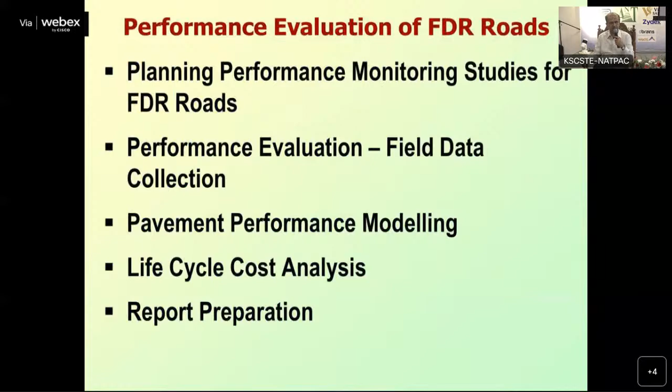Starting, how do we go ahead and plan our performance monitoring? Of course, you all know what is distress in the pavement layer. Changes in the pavement layer materials manifest as distress, and distress affects serviceability. This is a fundamental thing you all know. Performance monitoring is basically determining the serviceability levels, which we define in terms of comfort for driving, comfort for riding, economy, fuel savings, and also safety.

Safety aspect I will not be touching here, because whatever the type of pavement, whether FDR or any new material or conventional material, it mainly depends, to an extent, on the material, but to a large extent it depends on the geometrics of the particular road. So that's why I will be confining to the other aspects.

Comparing performance of road sections having FDR technology with conventional road sections is what we should do. A new technology should be technically viable and economically feasible. It can alter structural or functional performance. Performance is of two types, structural and functional, as you all know. So whatever new technology we are adopting, it should be technically viable.

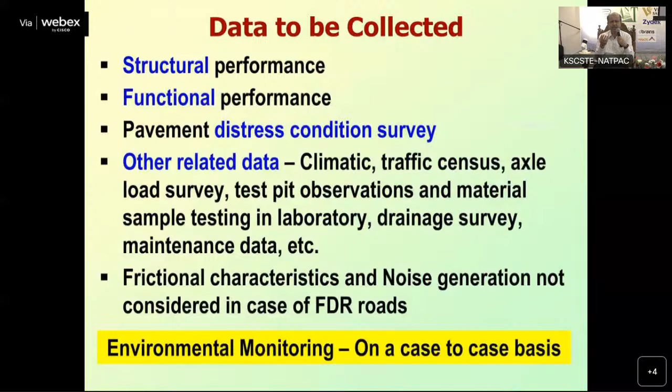Selecting the test sections. There are two aspects: one is a test section, another is a control section. Control section is a conventional road section selected for comparing the pavement performance.

Test section relates to FDR road, restricting the number of variables in the test section. That means in a test section, we can vary the percentage of additive, we can vary the thickness of that layer. So the number of variables can be there. But to get accurate and reliable data, we must restrict the number of variables in a particular test section.

That's the idea. Identification using GPS and chainage. What should be the length of the test section and control section? Minimum should be 250 meters and above. If it is between 500 to 2 kilometers, that would be the best.

Factors to be considered while selecting such test and control sections: Geometrics - for example, roads which have been inherited since the inception of when this city or town was getting formed. You might have seen that whatever the gradients are there in many of the roads, it's almost 6%, 7%. I have not measured, but very high gradients are there.

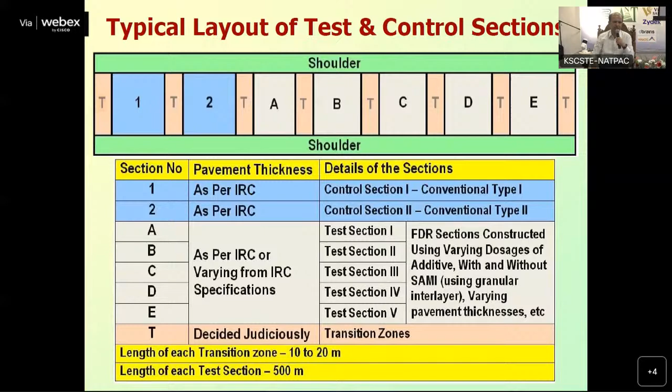If we vary and take different test sections, we would have very valuable performance data. That's important for the PIUs, the implementing agencies, to think and act on. Then, of course, for the transition zone in between, we can decide on the pavement section judiciously. I have given the lengths there.

Next, duration and periodicity of monitoring. The distress is caused by traffic loading and environment. Long-term monitoring, as I told you, is costly and delays drawing conclusions about the efficacy of the new technology. That's why 10 to 15 years of monitoring is ruled out, at least for these PMGSY roads. We can go for 3 to 5 years.

Optimal duration, I have written 5 years, but now even less than 5 years is considered, because previously we used to have this kind of 5-year plan project, but now we think 5 years is too long a period. So 3 to 5 years, maybe I would say.

Alternate way: monitoring sections of varying periods of service life is not possible for FDR. So an alternative to 3 or 5 years can be just 1 year, but in that case we would judiciously select different sections which have completed varying service life. Let's say we have one test section that has completed 3 years, another 5 years, 7 years, 9 years, and we monitor them all for 1 year. We would then have the data.

But of course, the key is that the soil conditions should be similar, weather conditions should be similar, traffic should be similar. But something we get in life, something we have to compromise. So judiciously selecting different sections which have completed varying periods of service life can also help. But I have put that here in gray color, because in FDR we don't have that facility—it's all new roads only. So we have to go with at least 3 to 5 years of monitoring.

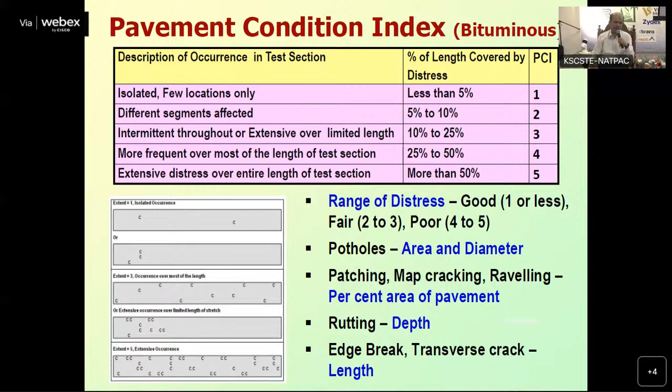Potholes, patching, ravelling, etc. Next, this is the suggested rating chart for the flexible FDR pavement. This, of course, refers to the IRC code as well as international literature. This has been suggested, taken from the draft given to NRIDA, and definitely it can be—it's only a suggestion in the draft. A little bit of changes can be made.

The recording format for this bitumen pavement distress.

Pavement condition index is a simple, convenient and subjective way of rating pavement serviceability on a scale of 1 to 5, based on the overall degree of failure assessed from a visual condition survey.

PCI can be decided using the operations manual of PMGSY, which gives two more methodologies for rating the pavement. One is based on what speed the vehicle can be driven on that road, and how comfortable we feel driving at different speeds. If we cannot drive more than 10 km/h, it is very poor; if we can drive over 40 km/h, the normal design speed, it is good to very good.

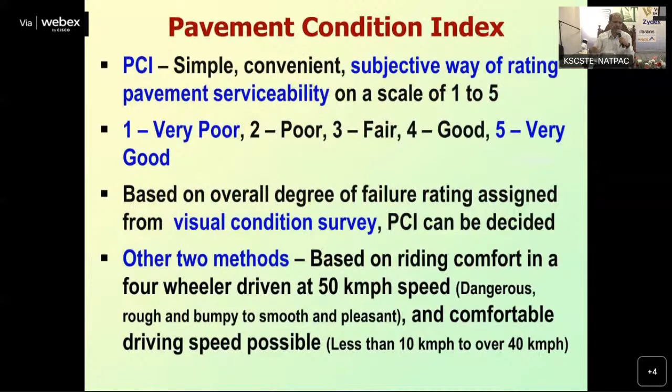Structural strength evaluation involves applying a standard load to the pavement and measuring its response in terms of deflection, stress, or strain. For FDR roads we must use the falling weight deflectometer, as Dr. Vishnu mentioned yesterday. It is the best equipment. Equipments like Benkelman beam and LWD also exist, but the Benkelman beam represents static loading, whereas loads on a road pavement are dynamic. Only the FWD, an impulse loading equipment, correctly represents that loading pattern.

Deflection measurement is the easiest. Stress or strain measurement is very tough, at least for highway engineers. Structural engineers are lucky; they can measure strain easily. But for us it is difficult, so we go ahead with deflection. Strain measurement is easier in structures rather than road pavements.

The deflection test is done in the wheel paths of the bituminous pavement, and the spacing depends on IRC code 115. From the deflection values we calculate layer moduli, and can determine the residual life and overlay thickness, if required, using FWD results.

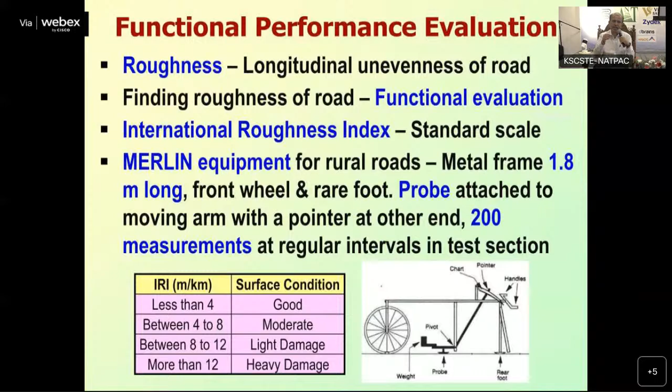Merlin is a very cost-effective, simple equipment, shown in the photograph and drawing given. It has a probe kept at 200 locations in our test section. Depending on the movement of the probe, a pointer moves, and we get a graph representing the roughness of that road, from which we calculate IRI, the International Roughness Index.

IRI is expressed in meters per kilometer, and the relationship between IRI values and surface type is given. Next, the important aspect of test pit study.

Test pit study is required at the DPR stage and also during monitoring, for physical verification of layer composition, density, thickness, etc. It should be done once or twice, with 3 test pits per kilometer. The size of the test pit is specified, and we must collect at least about 450 to 500 kg of sample from the test pit for laboratory evaluation.

Different tests are to be done depending on the pavement type. If our control section is a granular pavement, we perform those tests. If it is an FDR layer, the entire pavement—base and subbase—will be a single layer, where there is no gradation or LL/PI test; for that, we have to go ahead with core cutting.

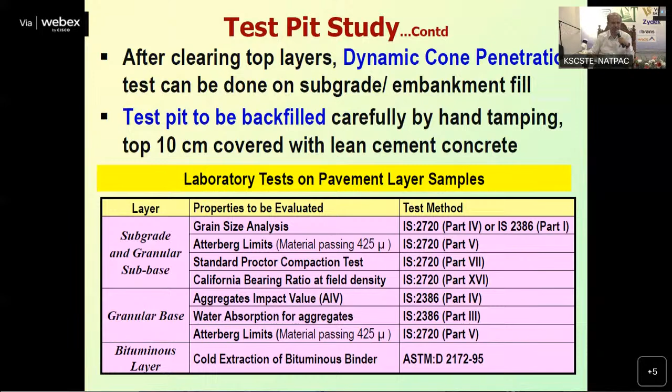If the diameter to height ratio is 1:2, no correction is required. If the diameter to height ratio is less than or more than 2, depending on thickness, we will have to apply a correction. NRRDA has already given the methodology for applying this correction, similar to that for cement concrete roads.

We are using that since many years, and in the same manner, the same equations I believe can be applied to FDR also. So no change is required, and the cube strength calculation also I have written there.

Traffic survey: we have to correctly estimate the vehicular traffic, and it's to be done once or twice during the study period. The survey is to be done during the harvesting season, because that represents the maximum traffic plying on that road, continuously for 3 days. Manual traffic classified survey along with axle load survey is to be combined, and ATCC survey when traffic exceeds 1 MSA, as per the NRIDA specification. So even if we are preparing this DPR, we have to go ahead with this ATCC survey if the traffic exceeds 1 MSA.

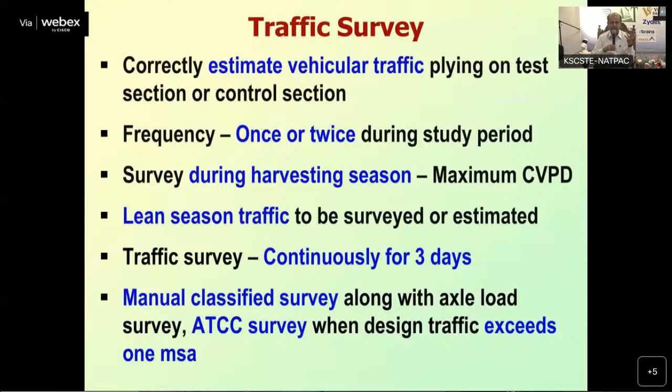ATCC survey has to be used judiciously, because even nowadays most animal-drawn carts are pneumatic wheeled, but a few states like Maharashtra and Madhya Pradesh still have steel-wheeled bullock carts. Another important point is that where tractors are used, they fit cage wheels because they want to work in rice fields. These cage wheels are not fixed and removed easily, so they remain even when the tractor moves on the bituminous road. These cage wheels do a lot of harm to our bituminous roads in rural areas. Unfortunately, we have to educate them—anyway, that's a different issue. But these cage wheels will be harmful even for our ATCC equipment also, if it is a pneumatic tube.

So the best way would be video-based survey; that would be the best ATCC equipment. With pneumatic tube, classifying two-wheelers and cycles may be a problem, but not with video-based survey, I believe—the software should be able to detect properly.

Efficiency of counting percentages I have written there, and that is to be checked manually by a 3-hour manual survey.

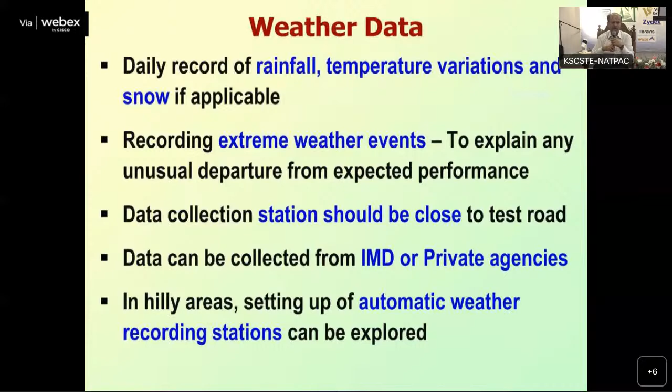Drainage and shoulder condition survey. Adequate drainage is required for maintaining structural soundness as well as functional competence. Camber to be checked, side drains to be free from debris, etc. Shoulders should be compacted, with no edge drop.

This edge drop is a phenomenon which we encounter in highways as well as rural roads, all over India—travel to any state, everywhere this problem is there, even in city roads. It's a nightmare for driving, a nightmare for drivers. Unfortunately, this condition continues. Just like potholes, this edge dropping doesn't get so much attention from the press compared to potholes, but it is also a very important issue.

Drainage to be rated on a 1 to 5 scale, depending upon how better or how worse it is.

These are all required for developing the modeling. So now coming to modeling,

What is modeling? Modeling is a mathematical description of the expected values of a pavement attribute during the analysis period. The attribute means functional performance, IRI values, or deflection values, structural attributes like that. The way in which the pavement's serviceability condition changes with time is called performance, pavement performance. The way in which we model these changes using mathematical equations we develop is called performance modeling.

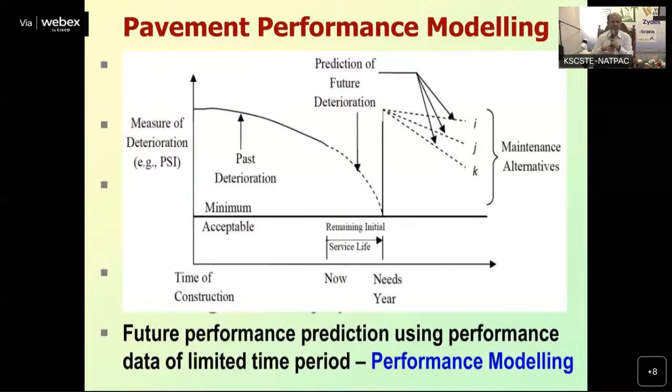This pavement modeling can be at network level or at project level. PCI and IRI play a significant role in pavement performance monitoring. Monitoring and evaluation data, structural and functional performance data, environmental conditions, material properties, and traffic loading - this is what is required, and various combinations of these different data are used to develop our models.

Out of about 100% of the data that we have collected for 3 years or 5 years, 70% we use for the development of the model, and around 15% each we use for testing the data and validation of the model.

Accuracy of the prediction depends on how we correctly identify the factors which affect the pavement degradation, and what accuracy we have achieved while collecting the data for these factors, for these variables.

There are many types of modeling we usually adopt. The broad classification I have given there - it can be deterioration models, or models can be life expectancy models. Deterioration models are more predominant in literature, and these two can be classified as deterministic, probabilistic, and machine learning.

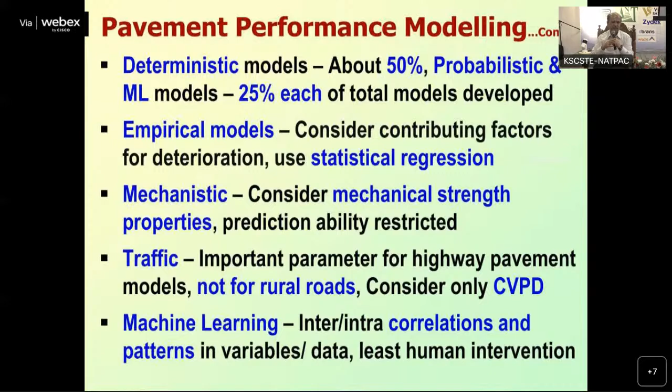Once we are through with the modeling, we can go ahead with life cycle cost analysis, economic evaluation for judging the long-term performance of different pavement options and investment options, assessing the total worth of infrastructure, considering the initial cost and the discounted future cost. That's the life cycle analysis.

There are many methods for life cycle economic analysis: net present value, cost benefit ratio, IRR - internal rate of return, etc. For FDR roads and new materials, net present value is the best method, because with cost benefit ratio, determining the benefit versus the cost may not be suitable for new materials - we will not be able to predict its performance correctly. So I believe NPV would be the best method for arriving at life cycle cost analysis for FDR as well as new technologies.

The steps involved: design and construction data is to be collected, which can be obtained from the estimates and the project cost. Then we have to correctly choose the discount rate and the analysis period.

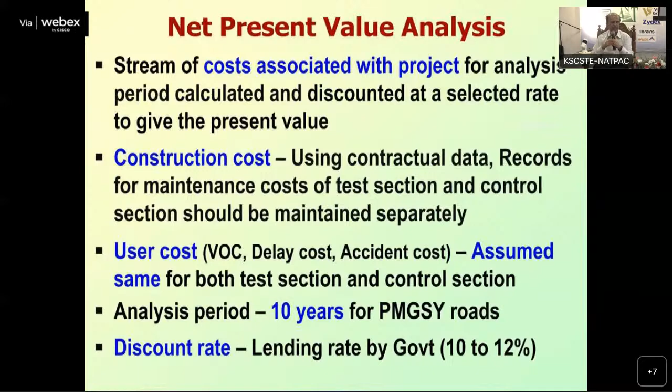This may not be applicable for FDR roads. That's why performance monitoring and modeling would be very much needed.

Environmental and social costs is a very important issue in present conditions, because we should be bothered about climate change, CO2 emissions, etc. This life cycle analysis deals with assessing the environmental impact of the alternatives.

FDR technology is considered to be a green technology. Definitely, it is a green technology. There will be lower CO2 emissions also, which will lead to lesser carbon footprint. There are so many softwares available for calculating the carbon footprint. Changer is one, and I believe open source softwares are also there.

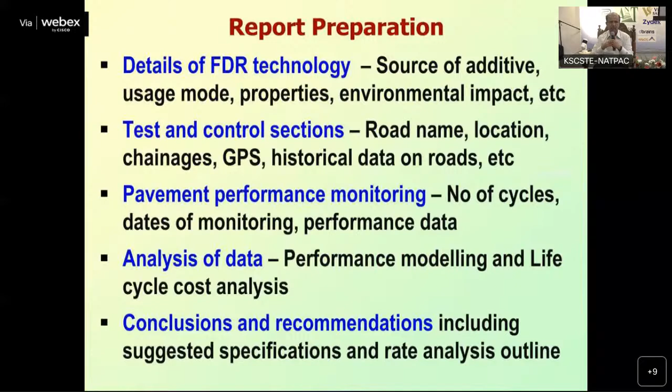The final step, of course, is report preparation. Once we are through with monitoring for 3 to 5 years, the analysis and report preparation follows. The report will contain details of FDR technology, test and control sections, pavement performance monitoring, analysis, modeling, cost analysis, and conclusions and recommendations, including suggested specifications and a rate analysis outline. These are the various components which will be there in our report. Thank you, and if you have any question, I would be glad to answer.

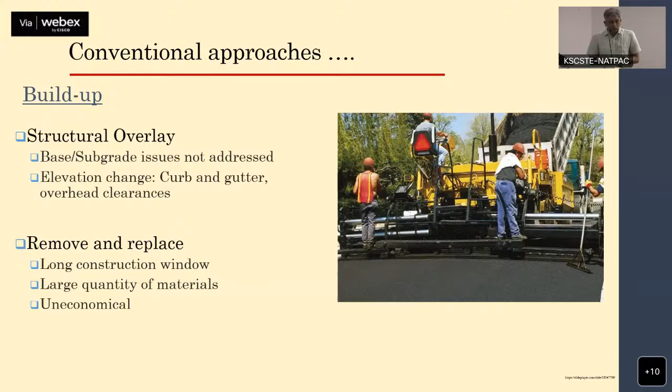Now the second option would be building down. This is where the FDR technology actually comes in. Building down means we already have an existing infrastructure—why waste it? We are going to maximize the utility of the existing sections and put a topping on top of the rehabilitated structure, giving a required amount of service life to the pavement. This is the essence of what FDR technology is all about.

Now by now you already know the benefits of it. Resource conservation is one. The construction window is one of the most important factors we deal with when doing reconstruction works. A facility has already been available to the public—now all of a sudden we come back and close it down. There is a big public outrage; they want to get it done as early as possible. So FDR actually supports that kind of an option. Economic viability and structural improvements, I will talk about in the following slides.

Now in terms of FDR, what exactly is FDR as a technology? It's basically a rehabilitation technique which involves recycling an existing pavement. In this recycling process, we are actually using the existing crust and base layers that are already there, and in many cases, or in most cases, certain amount of subgrade materials present in the location itself.

FDR, or reclamation, can be done in multiple ways. In the current scenario, we are going to be talking about chemical stabilization, where the strength enhancement is provided by addition of cement along with certain other kinds of additives.

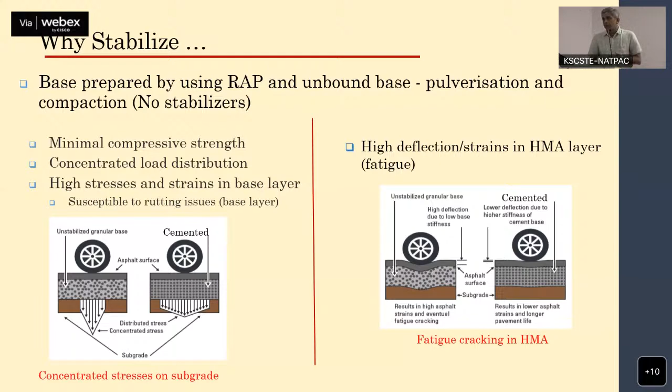Added advantage—we all know that water is the most problematic thing when dealing with pavements. Now water can come in from different ways: one from the top if there is a crack on the surface of the HMA layer, or it can also come in from the bottom through capillary actions.

Now the advantage of this stabilized material is that it fills out the voids present in the matrix itself by addition of stabilizers—I'll talk about it briefly. The end result is that the permeability of this layer actually goes decreasing with respect to time. So once permeability decreases, water movement from underneath is going to be stopped completely. So you are going to get a better life for your pavement section because of the reduction in permeability of these sections—an added advantage when compared to overlays and other options like milling and filling.

Crack propagation is one problem we all encounter. You have a fatigue problem on your pavement surface, you cover it up with an overlay, and in less than a year the crack starts showing up again. The same applies in case of a mill and fill option as well, unless you do some kind of corrective option. The reason is that the continuity is still maintained, so the cracks eventually cut through, and the milling option also has a problem with reflection cracking.

Now in case of FDR, what we are trying to do is completely recycle the material, so there is not going to be any existing bitumen layer after this process, which means the reflection cracking problem is completely sorted out. It will not happen, or to a very good extent it will not occur at all in these sections.

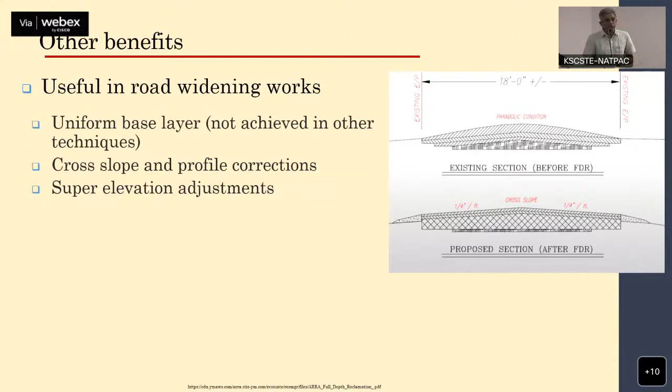The basic difference is that the amount of new material being brought in is going to be much less. Now, along with new material comes the transportation cost, a major chunk in construction nowadays, so that is taken care of as part of this process. That is why the cost saving typically comes in.

Now, how do we go for it? First thing is that FDR is a technology that, nowadays, people start taking as something very simple. Please remember, it is really not like that. You are working with a set of materials, a mixture of materials, starting off with the RAP base material.

This base material is of varying sizes, say from about 37 millimeters or plus to something like 19, 20 millimeters or even less, along with the milled fraction of RAP, which is less than 20. You're also going to have soil which is about 4, 4.75 millimeters below. It's a mixture of all these things.

You are adding an additive which is a chemically reactive additive, which is cement of course. Along with that, you are adding certain amount of additional mixing agents as well. So it's a combination of way too many things, and controlling, or rather avoiding variability in these mixtures is a very difficult problem. Now, how this can be done effectively is through proper monitoring, proper testing, proper mix designs, and all sorts of things, which we will talk about as we go along.

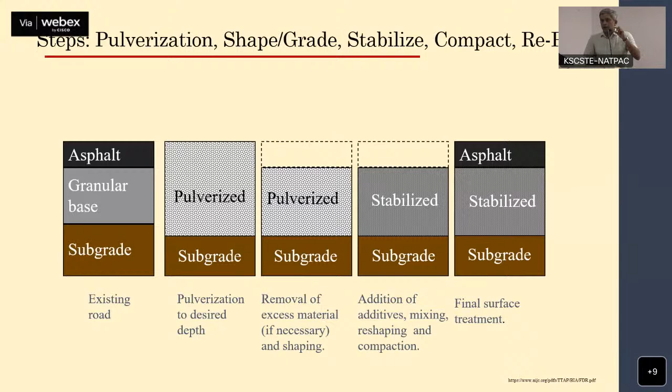So once you have this mixing process done, then you're going to add a certain amount of stabilizers and put a small overlay on top, which typically is of the order of 3.5 to 5 centimeters maximum.

So types of stabilization: one is mechanical, there is an option for using emulsions, and also additives or chemicals. Mechanical stabilization, I'm not going to go too deep into that. It is basically compaction - you are pulverizing the whole matrix, compacting it by physical force, and that is what your FDR layer is. On top of that, you're going to put your new surface.

Now, in terms of applicability, it is much less compared to others, simply because it is going to be effective only for low volume traffic applications.

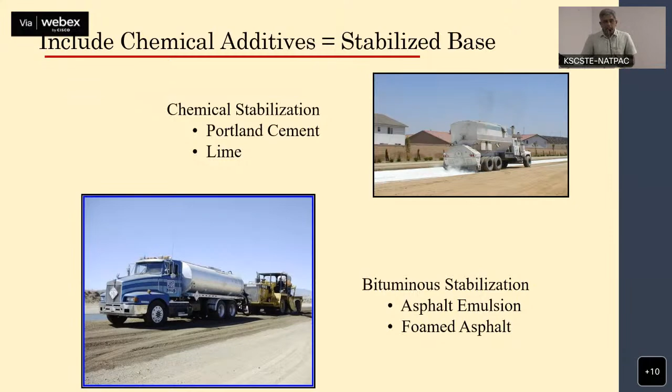Now, in certain cases, when you have damages in the subgrade or subbase layers, this option many times is not going to be effective as well. So the moment you add some kind of a chemical additive, which is a cement or a lime onto it, that is when it becomes a stabilized section.

Couple of options, if you look at it, if you use emulsion, there are two options when you are having an emulsion section. One is emulsion, the other one would be foamed asphalt. Basically the same thing, but emulsion has minor issues when compared to the other.

More amount of fines, emulsions become less effective. The other aspect would be the compatibility of emulsion with the aggregates present in the mix, which is also a key factor that defines suitability. So that needs to be accounted for as well.

In case of foamed asphalt, on the other hand, the excess fines that are present can be taken care of easily. That is the primary difference between the two. This technique can be applicable for medium to high volume traffic, but mainly with surfaces which have minor base damages or aging or oxidation related issues.

Now, the main thing for our discussion would be chemical stabilization, which comprises of two additives. One is lime and the other one is cement. Now, which one should we go for?

Lime is effective in cases where the PI value, the plasticity index value of the soil, is greater than 10, which means there is a significant amount of clay present in those soils. Now, if the PI value is less than 10, cement many times becomes the preferred option. Reasons we will talk about.

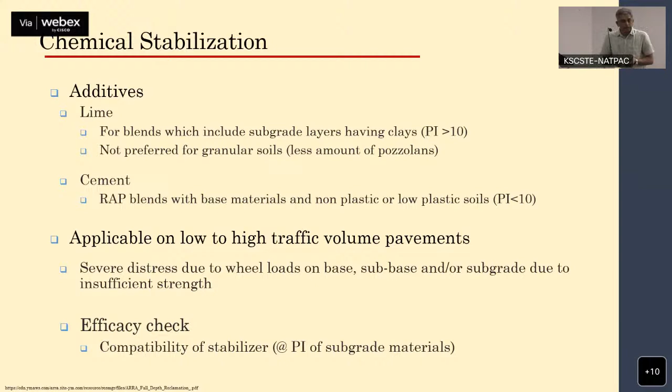And these kind of sections, the cement stabilized sections, can be used in high volume traffics. It can be used in cases where the pavement has base or sub-base damage. Then, all those sections, this can be used.

Now, cement actually gives a much broader range over which we can work with it. That is from around low plasticity to something like medium plasticity. A PI of around 10 to 15 should be reasonably fine in case of cement.

Now, any other reasons for preferring cement? Simplest thing would be the construction time window. Cement gives good initial strength, early strength, which means it can be open to traffic, not within weeks, within hours, provided you have enough strength to sustain the traffic in there.

When I say hours, 12 to 24 hours, you have to check if the minimum strength requirement is there for the section, and this traffic is not heavy vehicle traffic. This is lighter motor vehicle traffic that can be opened up at these sections.

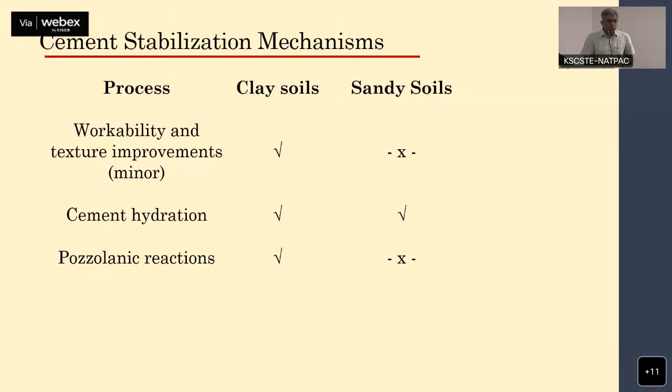The yellow colored platelets are clay particles, and you have aggregates along with it. So that is basically our pulverized mixture, which has got aggregates, clays, and a certain amount of water as well. Now when cement goes in there, with a certain amount of water, which is going to be the optimum moisture content...

Cement starts hydrating from the surface going inwards. So what happens is that when the surface gets hydrated, it actually connects these particles together, which means a matrix starts forming. That is where the initial strength of the cement mix comes from. Once the matrix is formed, it can take up some amount of load and it is good to go at the initial level for light or minor traffic.

So now what happens next? Once the matrix is formed, cement keeps on hydrating and lime keeps on forming. So the next set of reactions kicks in, known as the pozzolanic reaction. Again, it's the same as cement hydration, only difference is that the pozzolan, which is the part of the clay that provides the cementing agents, is much less here, and it starts dissolving very slowly.

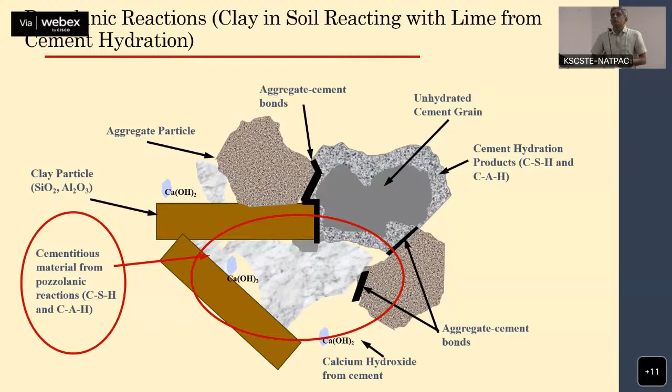So the advantage of having a slow process is that many types of cracking, say for example shrinkage cracks, which are common in case of cement addition or cement treated materials, are not going to be there because the process is very slow. In between, there is going to be some amount of traffic, which starts cracking the surface a little bit. These cementing products keep on filling those voids as we go along. The advantage of that is the strength keeps on increasing; there is no deterioration of strength in this process.

In terms of timeline, you might have gone to the site and realized that compaction has got to be done in 2 hours. Now what is the reason for that? Cement hydration starts within 2 hours and begins setting, so you have to compact your matrix within that time period. Cement hydration occurs over a period of time, starting with a few days, and it gets extended over months or years.

The pozzolanic reaction, which is the clay-lime interaction, happens for an even longer period of time, in terms of years. Now, from a construction perspective, you can divide the processes that need to be done into 3 steps: one is pre-construction checks, construction, and then post-construction.

If you look at pre-construction, that includes primarily 2 things: one is project evaluation and the mix designs that you do before the project initiates. Construction steps you might have already seen: pulverization, stabilization, compaction, curing, and all those things. And post-construction is primarily about quality checks.

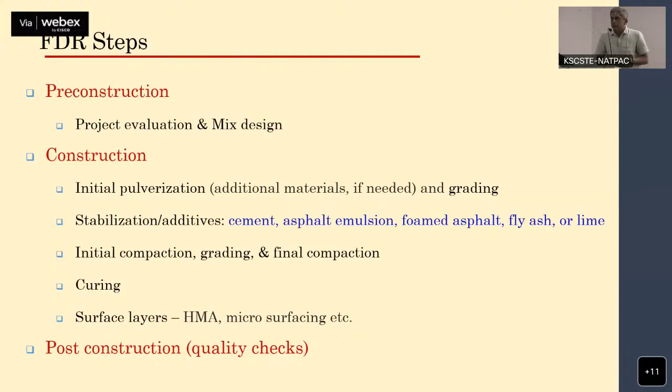Now, project evaluation: the first step is for you to identify whether a given road is a candidate for the FDR process. How would you do that? Broadly speaking, almost all flexible sections can be considered eligible as long as it is seriously damaged and cannot be rehabilitated or improved by doing simple touch-ups, maintenance, or other practices.

Now, if there is a problem with the base and subgrade, that would be another potential candidate. A quick way of estimating this is: let's say more than 20% of the road actually needs serious maintenance, which means the patch-up works we are doing are not going to be effective at all. That kind of road is a good candidate as well.

Now, there are certain exceptions in these cases which you need to remember as a practitioner. The moment there is a problem with water drainage, that section is not an ideal candidate anymore. The reason is that water comes in, interacts with these cemented materials, and they start losing out the cementing particles, so the long-term strength will not occur. Whatever you get before the water exposure is what you're going to have for a longer period of time. So you need to make sure the drainage issues are addressed properly before you actually perform the FDR works.

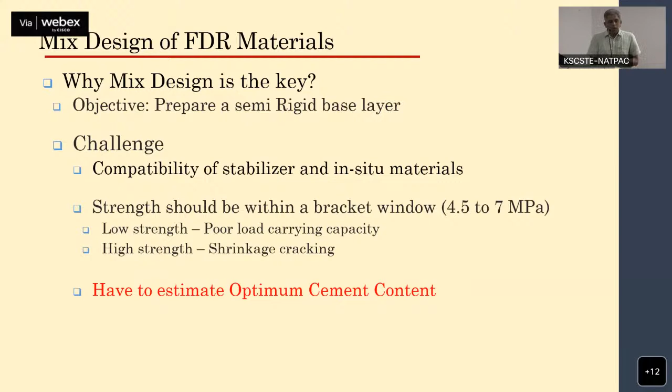What kind of aggregates? What is the amount of RAP? What percentages of clay are you actually using? All these things interfere with the strength gain process. The challenge for you is to arrive at the typical mix design, considering that there is cement, along with certain amounts of chemicals added to enhance the strength gain. All these things complicate the whole process, and it becomes very critical for us to estimate the optimal cement content that needs to be used. Now, sampling.

Easiest thing that can be ignored. Now, why is sampling so important? I think you might have an understanding of that by now.

Think about a section where you are sampling in one location where the thickness of the HMA layer, because of some overlays, is going to be different from the remaining half of it. Now you are basing your mix design considering that the quantity of RAP in there is going to be, say, 10 centimeters, and there are sections where there are 15 centimeters and more. The mix design you have developed, where the target window is achieved, is based on this 10 centimeter material content. The moment that changes, it is not going to fall within the bracket windows that you are looking for.

End result is a failure, even when you are doing your trial mixes, trial patches, or even construction for that matter. Mix design is perfect, some accredited school has done it, you have done everything correct, all the process followed, but the end is failure. Now, how can we overcome this?

The simplest thing we should actually have is to try to get whether you have any history of the pavement, the rehabilitation works that has been done on it, so that we can understand which sections are going to be similar and which ones are different. And you can actually play around with multiple mix designs for these sections, provided they are in a reasonably span over which it can be effectively done.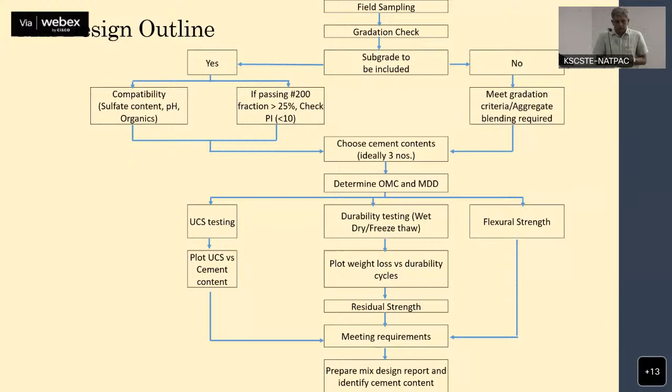Again, you have seen this many times, so I'm just skipping through it. Compaction and curing are two critical parameters. One thing is maximum dry density for maximum strength, so you try to achieve 98% plus with your mixes.

Compaction timing issues always happen. People try to push the numbers a little bit, saying 'okay fine, I have gone up to 500 meters now, let us just go 100 meters more and come back and do the mixing later.' The moment you start crossing that 2-hour time window, the strength goes down, because the cement actually starts setting at that point.

Once it is setting, if you try to compact it, you are actually breaking the bonds that are forming, which means the intended strength goes down because of that. So never push that timeline, try to always remain within it.

Curing, again, multiple ways are possible. Simple moist curing is often done, and the strength window is typically from 4 to 7.5.

Now, what kind of checks can a practicing engineer do in FDR work? The first thing is the site data, reviewing the available information would be the first thing I would do.

For example, the mix designs, the soil survey reports if available, and local information you can gather about what has happened in those sections.

Visual inspection: trust your eyes, see what you are seeing, make sure it is not significant. Be there, verify it, and don't leave that section unless you are sure it is not a problem and won't affect your mix.

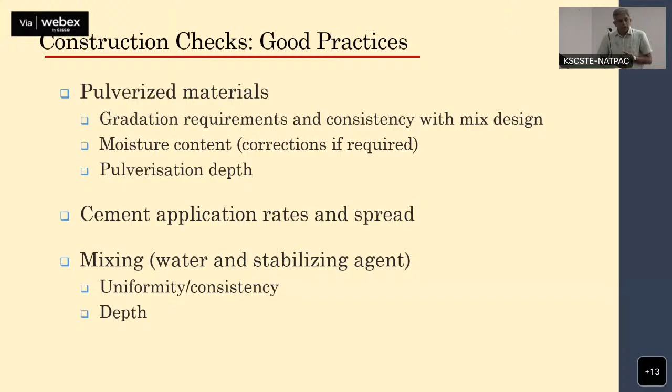Construction practices wise, a good way would be to establish your own rolling patterns. In the first 100 meters or so, the first trial stretch, you try to see what exactly is the kind of densities you are achieving, correlated with the type of passes that you have made. That way it can help you figure out the rolling patterns that need to be followed, estimated on the very first day itself, making life much easier later on.

Mixing and compaction has got to be ensured within 2 hours. Curing moisture's presence has to be verified as well. We have to physically verify and figure out whether there are any soft spots, which are targeted spots that need special attention as well.

Now comes the post-construction quality checks. Remember that it is not just one factor that contributes to the end result. It is a function of uniformity of pulverization, cement content uniformity, moisture content quantities, and compaction that you are achieving. Everything actually contributes to the end result, so you need to check all these factors individually while you are at the field. Then only a good product can be obtained.

Pulverization: a simple gradation test can be done in the lab office or the lab site at the site. Now if there is any difference you see from the mix design, simple corrections on site itself can take care of it.

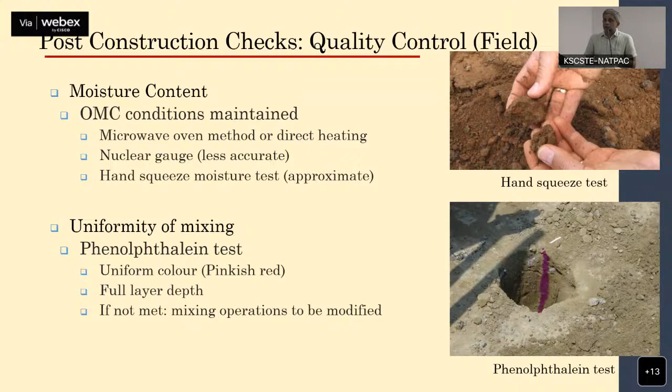Nuclear density check can be done using nuclear gauges to check the densities.

One thing you have to remember is that the cores that are cut from the field immediately after construction cannot be used for any kind of strength checks. It is not a good thing to do. Even if you cure it for 7 days and use that as a reference sample, it is not going to work, because when you are cutting a low strength material, there is bound to form cracks inside of it, and you will never get the exact same strength that you are expecting. So those cores are never going to be used for strength measurements.

Quality controls, again, I think the topic has been discussed. These vary depending upon agencies, and this is coming out of that orange book that NRRDA has developed, with exactly the same numbers. So you're going to be checking for pulverization, gradation, cement application rates, optimum moisture content, field moisture content, strength, and all those parameters. The frequency numbers given there may vary depending upon agencies.

Last slide. Just remember one thing: it's a very fast process in terms of time. You are going to have a 1 year time window.

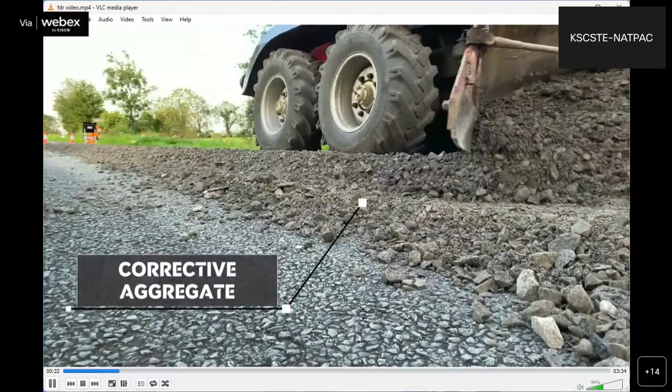For these reasons, Colas Ireland is actively promoting cold in situ recycling under our recently launched Go Green with Colas initiative, thereby saving valuable natural resources and reducing carbon emissions.

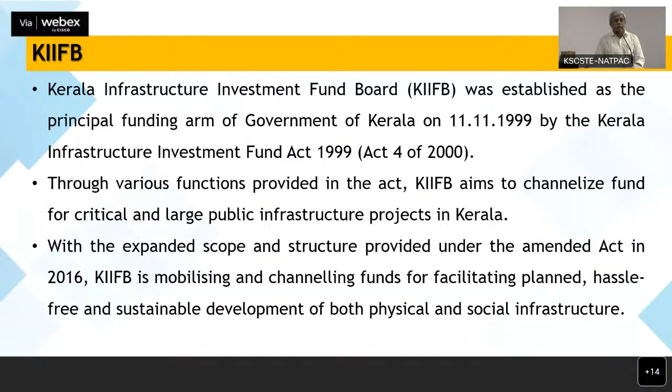So the fund was established with the main objective of providing investment in projects in the state in areas like transportation, water sanitation, energy, social and commercial infrastructure, IT, telecommunication, etc.

KIIFB's functions include assisting various government agencies, because we implement projects through special purpose vehicles, which are different organizations or departments of the government. Through them only we implement the projects, and we provide technical support. We are the nodal agency for scrutinizing, approving, and funding major infrastructure projects in the state.

So KIIFB, along with the development of infrastructure, is aiming at implementing advanced and sustainable technologies. Various things we have tried in the state include FDR, geocells and cellular confinement, soil nailing techniques, microsurfacing, permeable pavements, segmental block reinforced earthen walls and geogrids, precast pre-stressed concrete pavements, hydroseeding, ultra-thin white topping. Some of these have been implemented already.

I don't want to get into this. You have seen this for the last 2 days, so I don't want to talk about it.

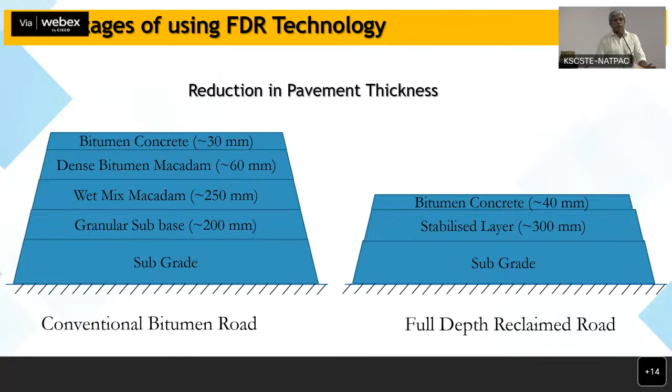How FDR helps in reducing pavement thickness: in KIIFB, we implemented a pilot project on the Anedi Padakulam Road in Pathanamthitta district, around 5.9 kilometers in length, using this technology. The project was completed in 2018.

When we tested the conventional pavement design at that time, the total thickness came to around 540 mm. When we did the design for FDR, the total pavement thickness came to 340 mm.

We are using the material available at the site itself, thereby reducing the requirement for virgin aggregate. I don't want to repeat the same thing again, since you are hearing it from the experts who implemented the project, and from the researchers and academicians.

You are continuously hearing this, so I don't want to explain too much on this.

So to explain, the total length of the road was 5.9 kilometers, and the binding agent cement added was 4%. The stabilizer used at that time was Stabil road.

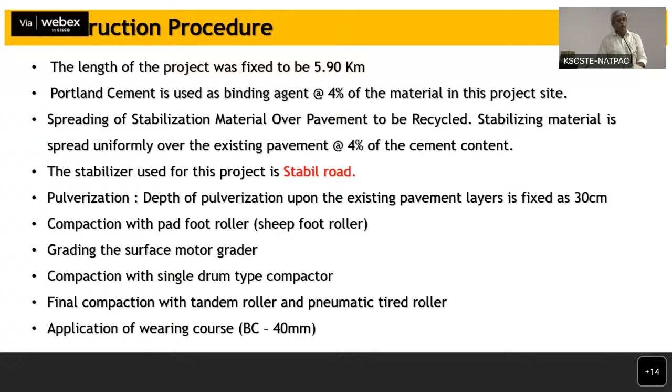As you heard previously, pulverization, compaction, grading, and compaction were all done with a wearing course of 40 mm. This process, you have seen many times, so I don't want to go through it one by one.

So you have seen all these things in various presentations, and how the technology is implemented. A core test was also taken at the end of implementation.

The minimum compressive strength for the stabilized material at the site was 7, and as per IRC 37:2012, the requirement is 4.5 to 7.

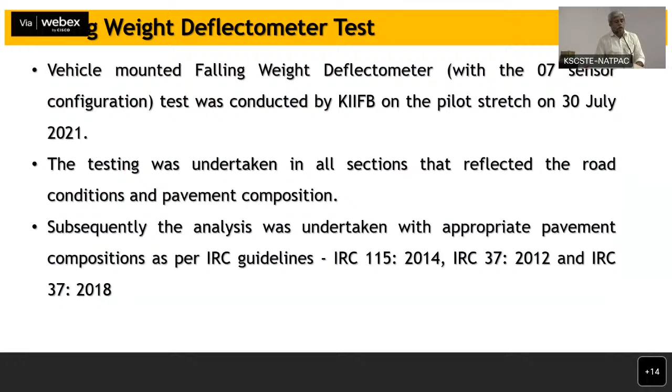Then we conducted FWD surveys subsequent to the implementation, one immediately after and again in 2021. The results found that all sections had good, almost the same road conditions and pavement composition.

The predicted traffic life for the pavement is much more than what was aimed at the time of implementing the project.

The remaining life of the existing pavement, based on 80% reliability, is found to be safe, and hence no overlay is required based on the FWD results.

So what is found is that even though the pavement is designed for 10 MSA, the analysis showed it can carry much higher traffic in terms of MSA.

This is the present condition of the road, photographed last week. After 5 years of implementation, the condition of the road is like this.

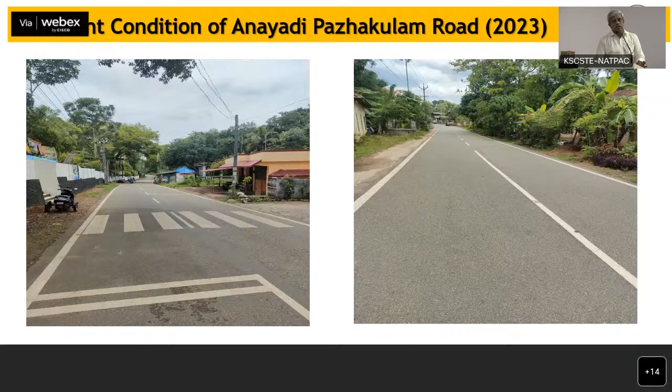The advantages of FDR, again, I don't want to repeat the same thing you are hearing repeatedly, even though we prepared this, it will be boring to repeat it again and again.

Now coming to KIIFB funded projects, we have taken up implementation of FDR on 9 roads already. The cross section we are following is a 5.5 meter carriageway with 0.75 meter shoulder on either side, with a drain-cum-footpath of 1.5 meters.

These are the roads for which FDR has already been awarded, totaling 95 kilometers. Work has started in Kollam district, on the Pathanapuram Enath stretch for 14 kilometers. For other roads, preparatory work is going on, and in Trivandrum district, the work will start soon.

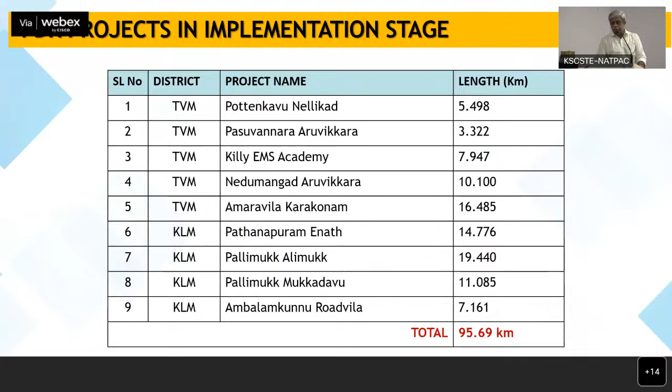And subsequently, we are thinking of taking up FDR projects in another 20 roads covering various districts in the state. So the preparation of DPR and the technical sanction process are all in advanced stages.

So in conclusion, full depth reclamation in particular has great savings in time, energy, material and cost. Through interventions of KIIFB, we could commence this environmental friendly process in the state of Kerala.

So with the adoption of FDR technology, there is substantial time, cost and material saving in construction. With the savings we get from these projects, we will be able to take up more jobs. We have taken these projects in low volume roads with traffic less than 10 MSA and where CBR is more than 5%.

So this is a short presentation. Basically, we want to show the list of roads we have already taken up and what is coming up.

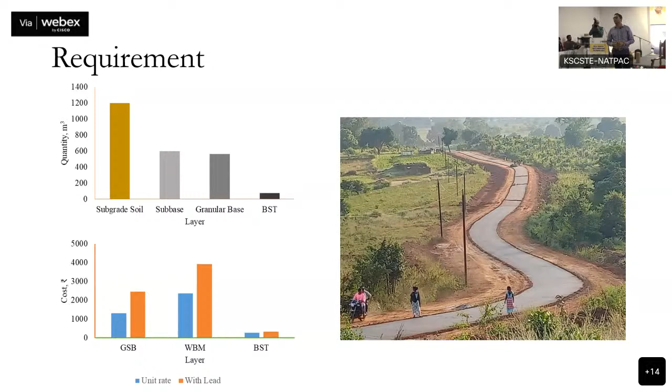I will not go into much more detail, but let us recollect why additive based technique was selected. The four areas of full depth reclamation are unstabilized technique, stabilized technique, additive based technique, and foam based technique.

Most commonly adopted is additive based stabilization, as FDR is the process of reclaiming the existing material. It is not to be confused with the conventional stabilization process, where the virgin materials are processed with selected additives and constructed as a fresh layer. But in the case of FDR, we use the existing material.

So the 4-step process we have been discussing since yesterday, I will just list it and skip ahead, and present what we have done in the Northeast. The 4-step process is: pulverization, mixing, compacting, and then providing a wearing course.

As it has been said, this 4-step process is not so easy to implement, not so easy to select, and not so easy to design. Even in a small PMGSY road, small in terms of traffic and geometric constraints, we faced a lot of dilemmas and challenges to arrive at a proper framework to implement this FDR technique.

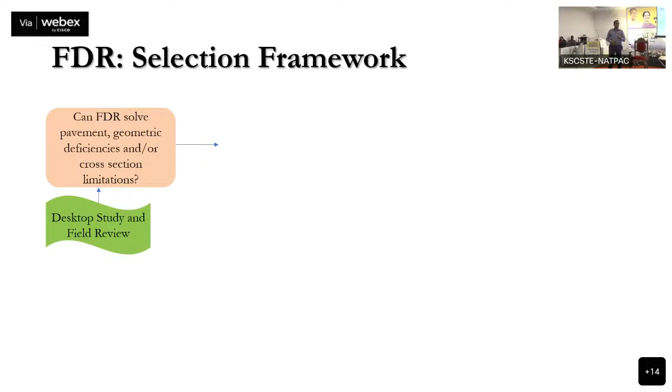The next process is to check our maintenance record, to ask ourselves whether such roads' patchworks or maintenance are not effective. That gives an indication of structural failure of the pavement section, mostly the base and sub-base layers.

Then, as the previous speakers have told you in detail, we check whether there are any drainage issues. The question may again arise towards the end of this session, since we talk so much about drainage from decades of highway engineering: why are we not considering drainage issues in FDR? There are some possible assumptions and considerations.

If your pavement structure is subjected to saturation, FDR may not work. Most importantly, is the existing subgrade good enough? If there is a subgrade failure - for example, most European countries check to ensure the subgrade modulus is not less than 40 MPa - if your subgrade modulus is less than 40 MPa, that indicates a subgrade failure.

In common terms, we characterize this material by CBR. That CBR could be less than 3. In that case, FDR is not the solution. So a 'no' to any part of this framework means FDR should not be used. If it is 'yes' to all, then an FDR technique could be adopted.

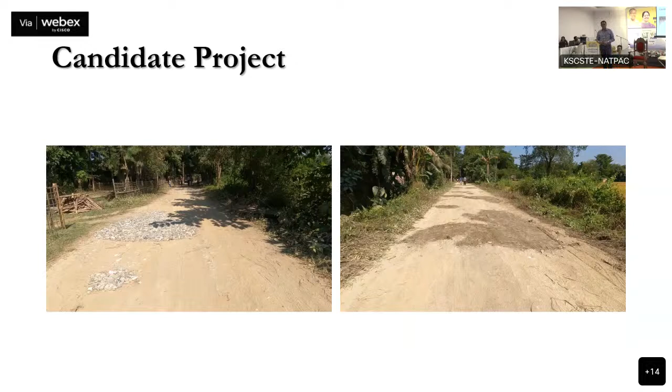After identifying this as a candidate project, the next question was: what should be the FDR depth, and what additive should I consider? We started looking - most of our PMGSY routes only have bituminous surface treatments, and if we're calling it an FDR candidate, there won't be any bituminous surface left; it would have been washed out.

In some cases, there may be projects with a distressed bituminous surface, perhaps in a higher category, even in low volume roads, where some states would have provided dense graded mixes like the previous semi-dense bituminous concrete, or now what UP uses as a 30mm BC. In such cases, some bituminous layer could be present.

Then should I consider both the bituminous layer and the base layer? We also had to decide whether to consider the sub-base layer, or full sub-base layer, or even touch the subgrade. With various scenarios, the risk also follows. The risk is relatively less when you confine your FDR to the layers which have failed - mostly the base layer would have failed in rural roads, as we anticipate.

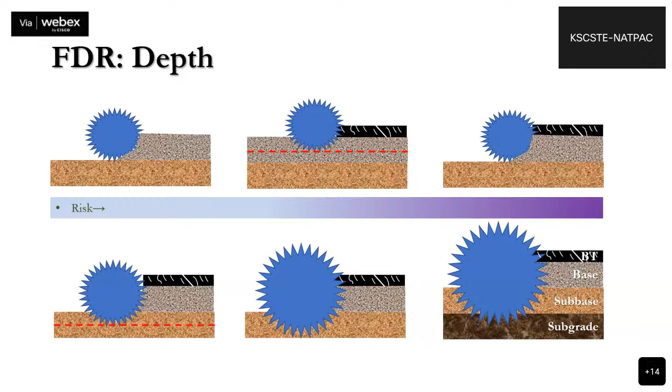If the sub-base layer, the risk is low, not only because of your structural design but also your failure confinement to only the base layer. The risk is low because implementation is easy, rehabilitation is easy, and further addressing the failures of FDR, confine the FDR depth to the problem-associated locations or the problem-associated depth alone.

If we go with higher depths, the risk is substantially high, especially when you touch subgrade. For example, in most FDR techniques we go up to a depth of 250 to 300 millimeters. Suppose today you compact a subgrade stabilized layer of 300 millimeters and provide a SAMI or a bituminous surface treatment. Further, in 5 years, 10 years, if you have to rehabilitate or strengthen that layer, up to what depth will you do milling, up to what depth will you do recycling?

Eventually in the next decades, we all will be recycling existing pavement where we don't have any virgin materials. In those cases, addressing this becomes a big nightmare for all of us. And one more challenge: even today, when we have soil, granular material, bituminous material, all materials are different. The variability imparted by the composition, proportion, and inherent properties of this material to the FDR process is a nightmare. That's why we have to be very careful when selecting the project and the depth of reclaiming we are deciding.

This will also answer us what type of additive we are using. When we did this exercise, we were carefully looking at what type of additive we should start with. There was a very good question: why go for bituminous emulsion? Definitely you can go for bituminous emulsion or a cold process.

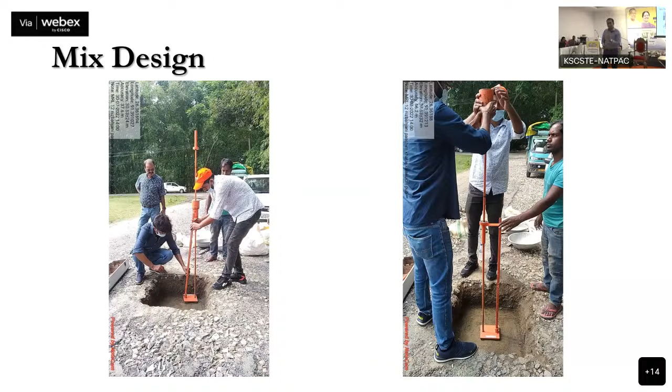My pavement is not failing because of any subgrade issues. In our case, it was a PMGSY road, and we hardly had a crust of 200 to 300 millimeters. These crusts are the ones that bear the load, and if we assume the failure is only because of these granular layers, we might not be fully correct. That's why in all projects, we have to ensure there are no subgrade related failures.

So then we started collecting the sample and bringing it to the laboratory. Then we looked at it ourselves, and the information was totally absent.

What type of gradation should I adopt for reclamation, for FDR? Can I directly borrow from some of the Western countries? Yes, they have the process, but we have to accept certain limitations.

Other than India, I'm not sure anywhere in the world they are practicing WBM for granular layers, at least for paved roads. Only forest roads, farm roads, or recreational areas may use these methods, but not everywhere. But the guidelines developed by American or European practice, where WBM was not used, we cannot take those gradations directly.

So we have to do a lot of exercise to arrive at a consensus gradation that I can adopt for a PMGSY road. For that, something is already handy with us in the IRC guidelines.

If you see, we have many guidelines available, starting from IRC SP 89-2010, IRC 37, MORD, even MORTH specification is also there. The MORTH and IRC 37 specifications are almost the same. So we had various combinations.

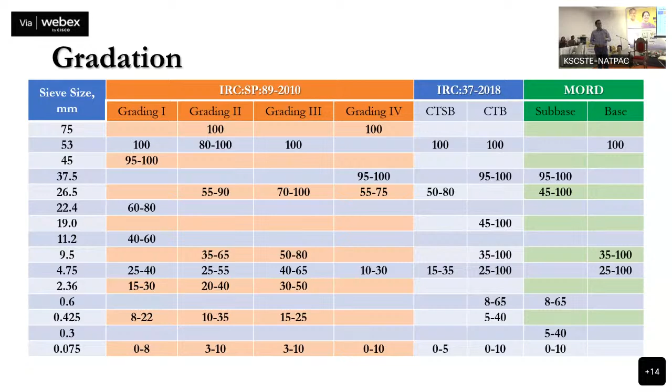Clearly, even in the stabilization process, these are all recommended for stabilized layers, either soil treated with cement, fly ash, or lime. If you see, the particle size distribution varied from as high as 75 mm to 75 microns. This gave us an idea that we can restrict or adopt larger sizes also, unlike what is shown in the literature.

So if you see any of the FDR guidelines developed elsewhere, you will see 100% passing 75 mm, 95% minimum passing 50 mm, and 55% minimum passing 4.75.

In PMGSY roads, if you use any material that is only 55% passing 4.75, such roads may not last, according to my limited experience. Because in our PMGSY roads, the structural layer is the granular layer, not the bituminous layer, and if you have such fine-grained material in these layers, our roads would not last. So technically, such gradations may not be suitable for our practice.

Then comes the current stabilization practices available in MORTH, where for fresh material, suppose you want to produce a cement-treated base or cement-treated sub-base, some gradations have been given. In order to adopt that, I have to have an in-situ material meeting this gradation.

Most of us know, I have seen many of my friends, STAs and all, started using WBM grade 1, where the nominal aggregate size itself is 75 mm. Now we cannot have a practical sieve during the reclamation process to take out all that aggregate. At the same time, we should find a way to substantially use that material or not.

So then we proposed it. In most of the projects we have seen, 75 mm is the maximum passing, and in one or two projects, a negligible proportion is retained on 75 millimeter. So from 75 mm to 75 microns, we have come up with some gradation bands which can be implemented on a trial basis.

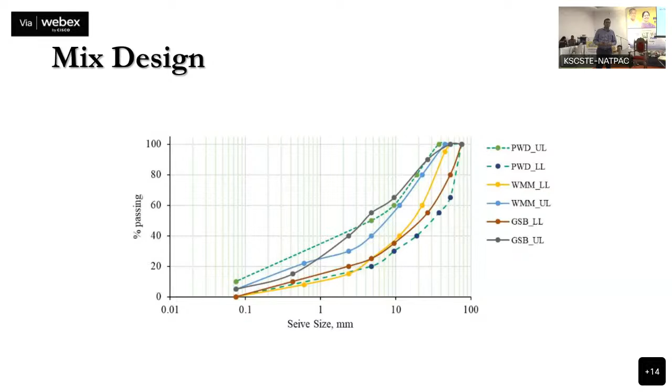In such zones, we have technically identified 4 or 5 projects. From that, projects were selected for case studies as laboratory mix design evaluation. So we adopted the gradation for these projects. If you can see, the gradations we have proposed almost meet our MORTH requirements as well as MORD requirements. Only catch here is the gradation we have proposed allows you to accommodate larger sizes up to 75 millimeters.

So then the routine process: bringing the material to laboratory, doing rigorous sampling, sieve analysis, determining its soil moisture relations, that is your MDD and OMC relation, to identify the optimum moisture content to orient this material under a given compacted force to a dense mass. We tried with additive, without additive as well.

For the gradation and for the materials, in any of our projects, we didn't disturb the subgrade. Subgrade was not included. So for this, with cement or without cement, we didn't find much deviation in the MDD and OMC characteristics, because relatively the cement dosages we started as a trial were relatively less. However, it can be done as a project specific mix design exercise, where with additive and without additive, determination of

moisture density relations are very, very important. What is the target strength I should jump at and adopt? Is 4.5 safe for me, or is it not adequate, or can I go for lower values? So when we reviewed within the country, we found a lot of information available which can guide us on what should be our target. So you see MORD, Ministry of Rural Development, clause number 404.2.6, says that in case of subbase, a cement treated soil, you can have a UCS value of 1.7, and in case of base, 2.76.

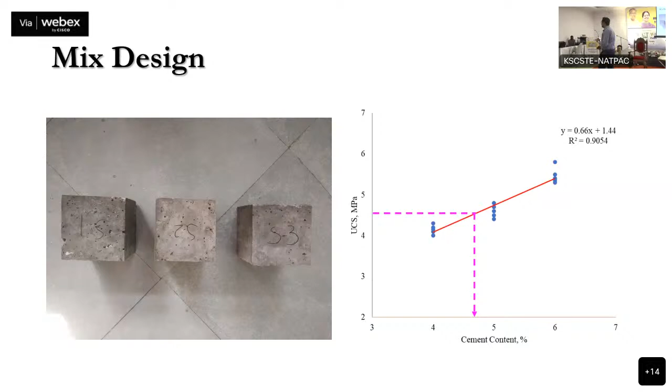Including the durability test. For the durability test, we practiced method 1, which is an immersion method, where you have to cast your specimen and continue curing in the natural process, maybe a wet sand curing, or you can immerse that in a dedicated environmental chamber, and one set you will immerse in a water bath. Then after 14 days, you take the ratios of your unconfined compressive strength, and if the retained strength is more than 80%, then it meets the durability requirement.

If not, the next method: if you feel that your project location experiences rigorous variations in temperature as well as rainfall, if it is snowbound, you can go for wet and dry cycles or freeze and thaw cycles. In any case, the mass loss should be less than 20% for base layer, 30% for sub-base layer, and even for hard shoulders, which is most essential for hilly regions like Northeast. There also you can go for these materials where the durability criteria is mass loss should be less than 30%.

When we did these exercises, almost all mixes met the durability requirement. We didn't have any challenges in accomplishing the durability with the gradations we have proposed, and that was with various additives as well.

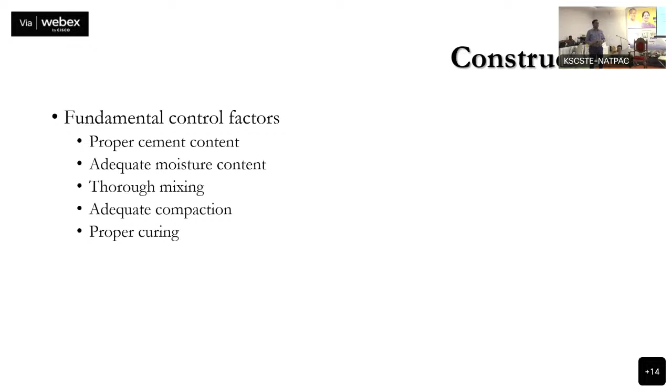So with that, I'll just come to the construction. I'll summarize what we have to keep in mind, as we have been aware from the last day. These are all the fundamental control factors we need to consider: proper cement content, adequate moisture content, thorough mixing, adequate compaction, and proper curing.

These three - if we don't have an expertized process in this, then we cannot achieve a reclamation process. I'll just summarize this and go to the last component.

But if you use a pad foot roller or a sheep foot roller, the compaction process is from bottom up. It is very easy to ensure the process starts from the bottom up, that is, the lower part is compacted. And once your target of full reclamation is more than 200 millimeters, this cannot be achieved with conventional vibratory rollers. That's why the use of pad foot rollers or sheep foot rollers is compulsory in case of full depth reclamation, where the reclamation is more than 200 millimeter.

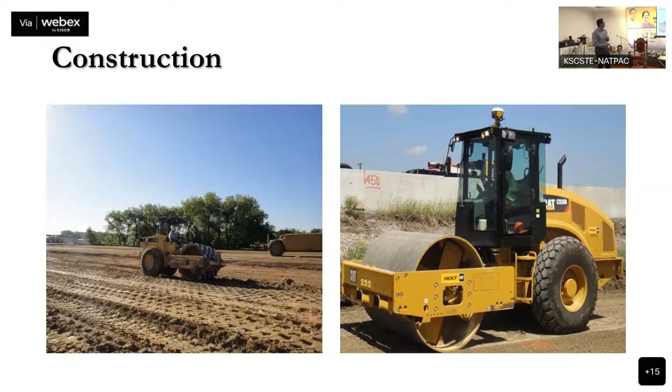So after the process, typically any bituminous surface treatment suitable for rural roads is used, either it could be cold mix or hot mix, or sometimes concrete.

I would like to give one consideration on what we have considered in the Assam trial cases. We have been discussing about SAMI, whether it's suitable for the reclamation process, or whether a crack relieving aggregate layer is better.

In most of the low volume roads worldwide, they practice something called micro cracking. Micro cracking is a process which will mitigate the formation of large reflective cracks by inducing micro cracks.

What causes reflective cracking in a stabilized layer? We all have understood and are aware of this, but let me summarize some of the factors.

Compacting this stabilized material at a relatively higher moisture content is a factor. When you compact this full depth reclamated material at more than plus 1% of your optimum moisture content, reflective cracking could definitely be a concern. But in the field, there is no tight moisture control within our construction community, the implementing community, and that's why reflective cracking becomes a major concern in the stabilization process.

Higher percentage of clay is another factor. When you try to dig your soil for full depth reclamation, and if the soil has a substantial portion of clay, the probability of reflective cracking is relatively high. Rapid moisture loss, failing to achieve required compaction, and excessive amount of additives are all factors which can accelerate or invite troubles in terms of reflective cracking.

What we can avoid is by introducing micro cracking. So how do we introduce micro cracking? I'll show you in one more slide.

Before that, some methods to mitigate reflection cracking: first of all, we have to adopt a sequenced construction practice, and compact slightly at a lower or at optimum moisture content.

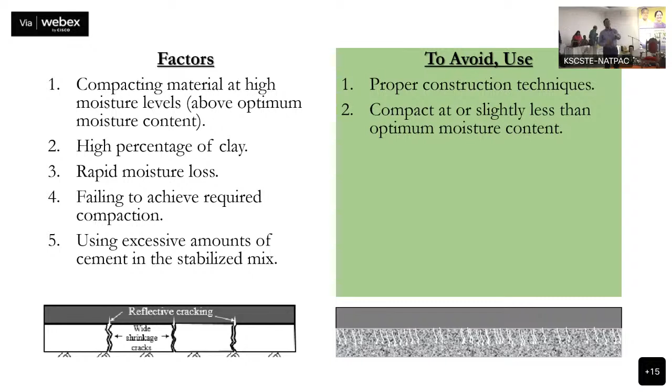Don't use an excessive amount of additives. When we do this simple mix design, we have to ensure that the mix design can be implemented by doing a trial section. In the trial section, you have to vary your optimum moisture content as well as optimum additive content. It cannot be solely dependent on the laboratory, because as we know, the laboratory is a beautiful air conditioned 1000 square feet laboratory, but your laboratory is your road. So there you have to recheck and revalidate the requirements of moisture or additive.

Curing is very important. It has to be started the day of your stabilization. Most of the times they will say we start curing from the afternoon. When you construct your house, your concrete, your slab, you will start curing the day night. But for the road, we wait for 1 or 2 days. Why? We all know the answer.

So the right amount of cement or admixtures, curing, and delayed surfacing is practiced in some countries. There was a question, sir, if we allow traffic. No, traffic that doesn't cause any structural damage to the constructed pavement, such traffic can be allowed.

Light traffic, that is non-commercial vehicles, may be allowed, which is predominant in case of our rural roads. I am not generalizing this experience to a national highway or higher traffic category roads. In case of low volume roads, where the predominant composition is not commercial vehicles, the delay may help because the shrinkage cracks or the shrinkage phenomena would have subsided.

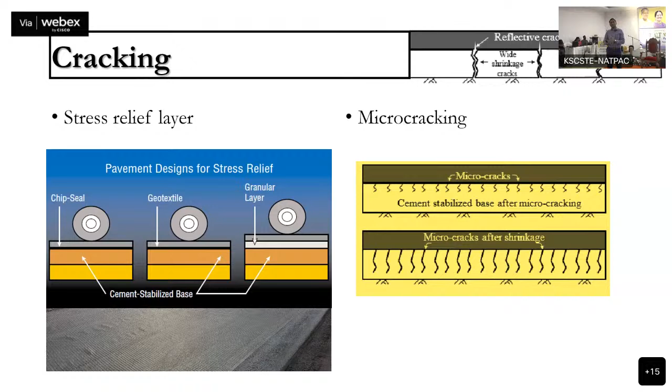So this is all about a very quick presentation about our experience in the Northeast, how we did this exercise, and so far how we are able to achieve a proper mix design with cement as the additive.

So construction machineries, all this has been discussed. Yes, we need a reclaimer definitely. An additive spreader, either a cement spreader, motor grader is required. Use of vibratory pad foot roller or the steel drum soil roller, single drum rollers, soil compactors are very essential. We should not use any tandem rollers, we all know that. Pneumatic tire rollers are also required where the pressures are high and the depth of the layer compacted could be relatively better. Excavators are required when you have to handle with your shoulders.

There is a practice where often they mix the shoulder with FDR. No. In India, we know the shoulder is not constructed with the materials which are supposed to be. Everywhere we go, share the photos, take the photos, the failure of shoulders. And when you take that material and mix it into your FDR process, you're inviting trouble again. Either you will go increasing your additive dosage or bring in multiple choices of additives because your material has degraded. That's why excavators may be required when you have to separate out inferior or poor materials contaminating your FDR process.

Water tanker, yes, definitely we need to maintain the moisture content. So some quality control tools I'll skip here.

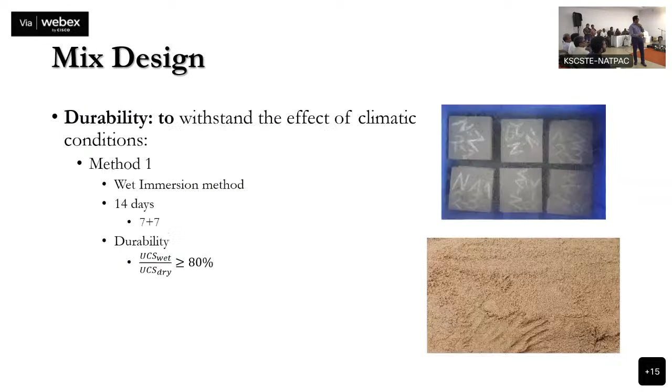In the title slide somewhere?

Is existing subgrade stiffness less than 40 MPa means what? The subgrade soil properties, whether it is weak soil or not, we investigate. If you say 40 MPa, that means CBR of 3 - that's what I mentioned. If you have to convert, if the CBR is less than 3, that indicates it is a poor subgrade. So CBR of 3, I'm just transferring to CBR.

4 is based on the shell design. Some literature also tells less than 3. No, but if you are being equivalent, it is 4. Equivalent, it is 10 times your percentage.

If it is greater than that, then the subgrade material is not a weak material. Then you have to check density and moisture content of the subgrade. If the density is... so in that case, you don't recommend FDR? Yes, if it is a poorly compacted subgrade and poor subgrade, I don't recommend FDR.

What is the solution for such things, what do you go for? You have to reclaim the material, take it to a stockyard, rework your subgrade and use it as a central plant reclaiming or recycling process - a perfect process.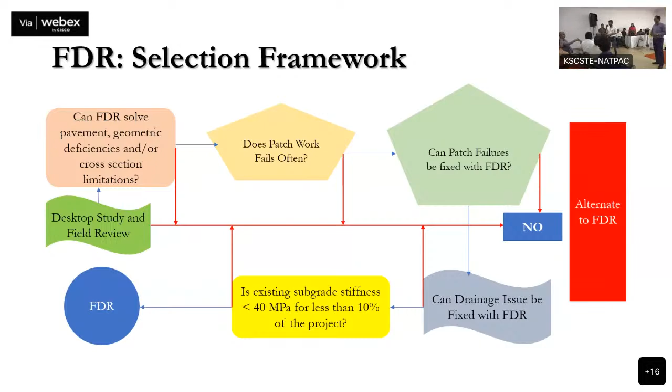Yes, that's what I have shown you. I have shown all those identification processes. Definitely, yes. Right. Very straight - that's all it is. Simple.

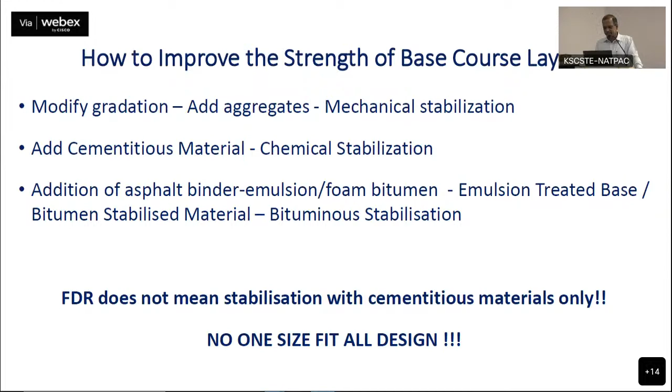So when is FDR suitable? Generally when you say the PCI value is 55, or there are distresses in the wheel path, excessive rutting—I'm not talking about how much rutting is excessive, or what value of alligator cracking is permissible. This is something that academicians should arrive at.

We have to tell—if I told 55, you can ask me why 55, why not 45? I have no answer. This is something which I feel academicians should work on.

Number of projects are available. You know the distresses as on date. So start your research from day one. There is no need to do a laboratory performance test. Every kilometer of the road being constructed with FDR becomes a test track. You start from day one—what is the distress, what is the soil type, what is the stabilizer being used, what is the cement that is used, how do you do the mix design, variability in mix design—and hence go to the performance.

So in some cases, the roads are being widened from 3 meters to 3.75, or 3.75 to 5.5. In that case, you are not only milling the existing material that has already been constructed, but you are also adding the shoulder material to that. As Anjan was mentioning, in most cases the shoulder is not constructed—we leave it to nature for the shoulder to get compacted. Mainly it is the drain soil that is being filled up.

I've shown this in many training programs, but nevertheless, specifications are different and what is being practiced is different. But why I'm bringing this up is that when you try to mix the shoulder soil along with the milled pavement material, what should be the proportion ratio for that project road?

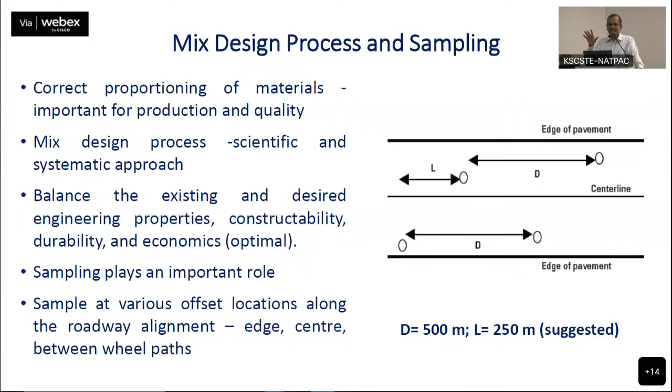Which section, which gradation represents that kilometer is another question. So my job as a teacher is only to pose questions, not to give an answer. I'm sure my students will be able to answer - like they used to say that driver will answer, I can say my students will answer the questions. So this is something that needs to be discussed and debated - what is that acceptable variation in gradation which we can consider as homogeneous?

So this is the point to be raised. Saying gradation - well-graded material is critical, strong. How strong? Poor graded material, gap graded material, which will have high fines, means they require a high cement content. So again, everybody made a mention that reclaimers are not crushers. Gradation has to be checked - gradation is influenced by the type of reclaimer used, and many other factors are to be considered.

Again, what all the speakers have been talking about is 4.5 to 7 MPa. Is it applicable to FDR or is it applicable to CTB? The second question is, are CTB and FDR one and the same? If you can answer this question - if they are one and the same, then 4.5 to 7 is okay. But now, what is the gradation?

The CTB gradation is something different, as you can see there. The do-it-yourself FDR specification prepared by Mr. Guru Vittal is different - he also considered the PCA specification, and with minimum dosage of cement he has come out with that. So incidentally, what Vishnu had mentioned is that if you look at the gradation of CTB, up to 4.75mm, 100% can pass. What matters, according to me, is 600 and 300 micron. Is that the gradation we are talking about?

Anjan said - Anjan also made a presentation on the IIT Guwahati specification. So is that working? Is it okay? How do you accept it?

So the first requirement from the academic institution is to decide, finalize, and zoom down to the gradation for the FDR layer, knowing fully well the layer that we are going to use consists of old premix carpet - one or two layers, old WBM, maybe grading 1, grading 2, and grading 3, and in some cases, including subgrade.

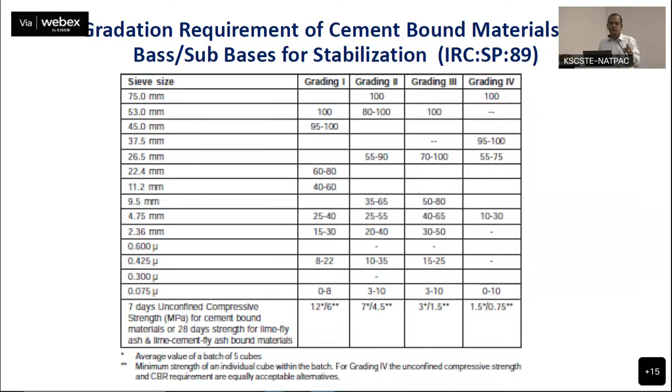Another point is that when there's a soil change, there's a change in material thickness of layer - how do you demarcate into homogeneous sections? Second, how do you consider the quality of the base course and sub-base, as Vishnu was mentioning? Earlier we used even grade 1 with 75 millimeter above.

We had boulders also. So when I visited UP, they removed physically the bigger aggregates and threw it out. When we were there, they were throwing it out. When we were not there, I do not know whether it will be thrown out or not. But that's what they were doing. So the mix consists of everything - it's a cocktail. WBM grade 1, boulder, grade 1, grade 2, grade 3, PMC, subgrade soil also.

Incidentally, another question also comes into picture. In some cases, as I was mentioning, to make the stabilizer work, you mill a subgrade, even to 20 centimeters. The whole pavement has got only 30 centimeters. You already milled 20 centimeters. For this FDR pavement layer, the resultant remaining subgrade is only 10 centimeters. Will that work? I have no answer. Will it crack? Will it bend more? Will it deflect more? These are questions that are to be answered, both theoretically as well as by field.

So again, as I was mentioning, the finished road level - Mr. Sigla is here, I think he will pose the question once again. KIIFB also should be able to tell the answer to this. Will the finished road level of an FDR pavement remain the same as it was before construction of the FDR layer, or will it increase? What are the incidental issues?

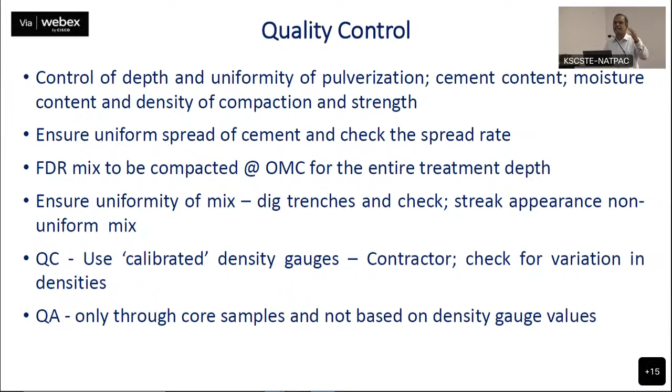So the quality assurance finally should be based on the cores, not on the laboratory density test either by nuclear or non-nuclear. I would prefer a minimum of 10 samples, 10 cores, any project - minimum should be 10, preferably more. Find out the mean, find the standard deviation, find the characteristic value, and mention that as the acceptable value before you accept or reject.

So UCS value, again, as Anjan also mentioned, 2 to 2.75. I personally feel for low volume roads, maybe 3 MPa may be adequate; 4 to 4.5 to 7 may not be required. If that is the case, your dosage of cement will decrease, your cost will decrease.

So these are other issues. Again, research institutions should do reverse engineering for the desired performance. What should be the pavement structure? For a given strength, what should be the layer strength? To get the layer strength, what should be the dosage of cement? So we should work back. I always work back from performance to the design. I don't go forward in chain from material to design to construction. I come from performance to design to the mix and then come back to the characterization of the material.

So stabilizer - again, cement enables strength gain and bonding. Stabilizer accelerates the strength gain with the heat of hydration. Higher strength we know results in cracking. Cement will work with a granular material. This again we told - so will all stabilizer materials ensure the material is friable?

With a big question - who decides the technology? For example, I think Mr. Dubey should be able to answer that question. Perhaps we will discuss it today afternoon again. He said that 5,000 kilometers or 4,000 kilometers are being taken up with 9 different technologies. How do you decide this road, this is the technology to be adopted?

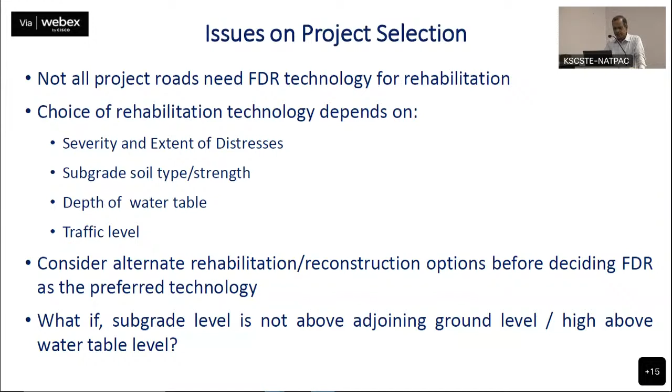What should be the subgrade strength that is needed before FDR becomes successful? Anjan mentioned 40 MPa - what is the basis? How do you decide that? Third, in case the depth of the water table is shallow, how do you do that? Should I increase the formation subgrade level, or can I do any other treatment as a waterproof layer? Can I do a capillary cutoff? Can I provide it - will it work? This is something research has to be carried out. So alternate rehabilitation actions are to be taken up before FDR is taken up if the subgrade is not higher than what is needed.

So issues with respect to stabilizer - as you can see, almost all stabilizers require cement. Why? I have no answer. My objective here is to pose questions - why do you need cement? The incidental question is that if cement is required, will not cement alone be adequate? What is that magic the stabilizer is providing?

Any commercial service provider will say it makes it friable, makes it flexible, makes it waterproof - all that they are telling. But nowhere - what I request KIIFB also - is to construct parallel sections with cement alone, so that at the end of a few years we will be able to compare the section with and without stabilizer. Again, yesterday they also mentioned 100 ml of the liquid. I also saw in UP they climb up the water container, pour it there, mix it by hand. So it makes magic wonders. But how does that magic take place? This is something which academic institutions should play a role in.

I ask about the quantity - Mr. Dubey was also mentioning they know the dose length to be covered with the OMC. As the truck moves up to that level, if all the water is consumed, that means that much water has been added and mixed. Now to this water, I add about 100 ml of this magic liquid.

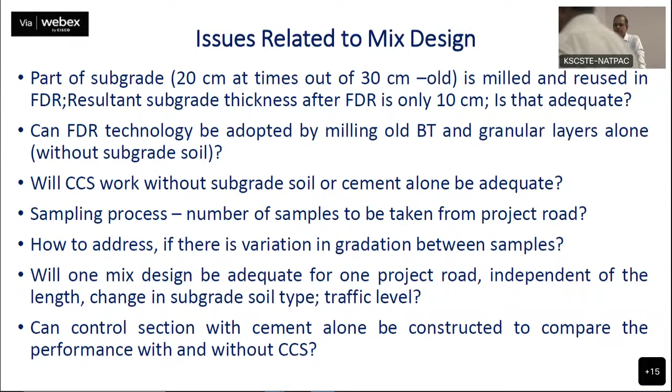So finally, what I'm looking at is an optimal gradation that is not coming up. So will one mix be adequate? A control section has to be constructed. Again, life expectancy varies - whether it's 7 to 10 years or 15 to 20 years - depending upon the overlay that we are constructing. So uniform density of compaction becomes an important factor.

Anjan can deliver a talk for one day also on intelligent compaction. I think it's a long way to go - whether it's suitable, how to go for it, is something to consider. Ensuring uniformity in the density of compaction is another factor.

Anjan also had made a mention that after 10 years, we may have to rehabilitate this road. I think we need not wait for 10 years - there are already failed roads. There are already available FDR sections that are constructed and cracked also. How are you going to rehabilitate this? This again is an R&D technology that has to be taken up here.

Other issues - as I was mentioning, FDR we are considering in isolation. It is considered as a mix, not considered as a pavement structure. So I think we need to look at it as a pavement component of the pavement layer. It will eventually crack - either isolated distresses - how to rectify it. This is another question that has to be answered.

The other question is about the crack relieving layer - is it required or not required? If required, should it be a SAMI layer? Should it be an aggregate layer? And if an aggregate layer, should it follow wet mix macadam gradation or a different gradation? Or can I do micro cracking? These are R&D items I personally feel should be taken up wherever FDR projects are under implementation.

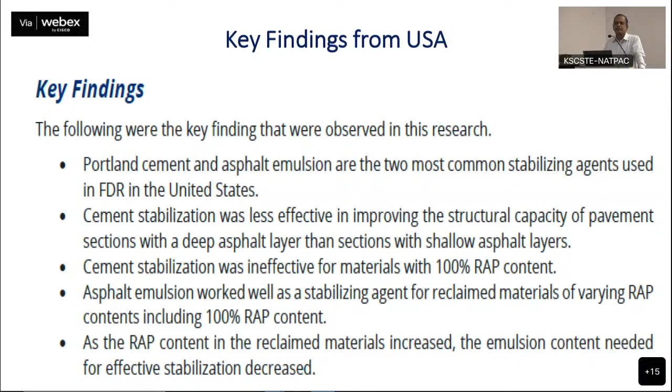Again, it depends upon whether you're milling the old BT and the granular layer, or are you going to mill the old bituminous layer, base course, sub-base, and subgrade. So the technology that has to be adopted will vary, again depending upon the different distresses.

Auger sampling they have adopted, but eventually, before you do the project selection for FDR, you should carry out a falling weight deflectometer study to find out if the pavement is structurally inadequate or adequate. There should also be allowance for time for the shrinkage to occur after curing. Low cement dosage is also recommended for minimizing the cracks.

So finally, the point that needs discussion is that FDR is not the panacea for all types of distresses. It is just like giving a Dolo 650 or paracetamol for any fever - that will not work. Depending upon the severity, extent of distresses, traffic level, subgrade condition, and the anticipated life, you have to choose whether FDR is the cost-effective solution.

Every project is unique. You cannot copy. Just because UP has done it does not mean that Kerala should copy the same. The soil in Kerala, rainfall in Kerala may be different from what is in UP. Technology can be learned, but you have to find a solution to your own problem.

So the mechanism of stabilization with cement and without cement has to be studied by academic institutions. Mix design to be carried out on sampling. How to do the sampling is another issue, debatable. Perhaps we can discuss that in the afternoon.

I personally feel that dosage of cement, with and without stabilizer, has to be optimized to get the strength. What strength is another million dollar question. Will FDR with cement alone be adequate is something that needs R&D.

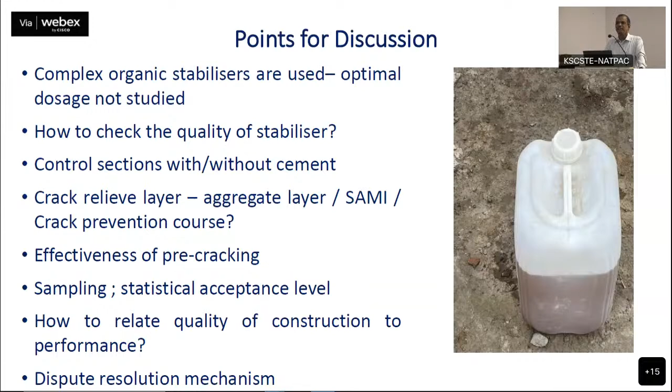Finally, how to relate the quality of construction to the performance. And to conclude, all projects, or most of the projects, will have a dispute between the client, the contractor, and the concessionaire. There should be a dispute resolution mechanism so that the project is not stalled, is not withdrawn. I think we have to go a long way in ensuring this.